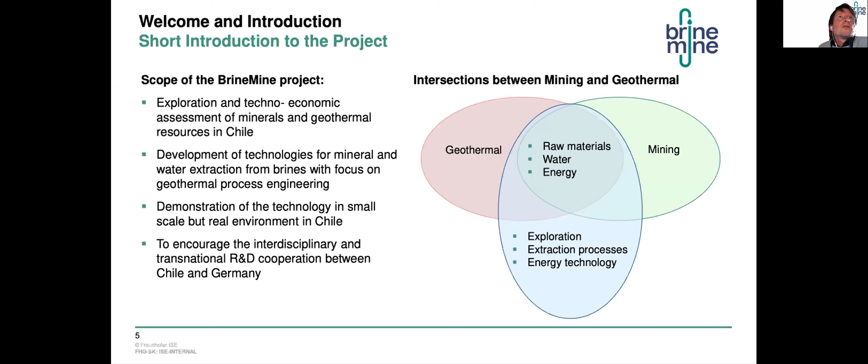The consortium consists of 7 partners. CEGA is already today represented by its director, Diego Morata. You'll present CEGA later on. They are together with KIT.

Sakul will present KIT later on, and GTN is involved in the exploration and the techno-economic assessment, while our institute from ISE together with the company Solar Spring will develop the extraction technologies. Our partners from Chile—Fundación Chile and GTN Latin America—will care for the demonstration in Chile. Finally, all partners are interested in encouraging interdisciplinary research work.

Coming to my last slide, this shows the main objectives of the workshop today. The workshop is quite important for us; it's one of the milestones of the project.

On the one hand, we want to share our actual research results that we got so far from initial tests in the Upper Rhine Valley in Insheim. We will also get an introduction to this site later on by Mr. Ude. But it's also quite important for us to receive your feedback and advice from all different levels, and all different stakeholders are on the roundtable later on.

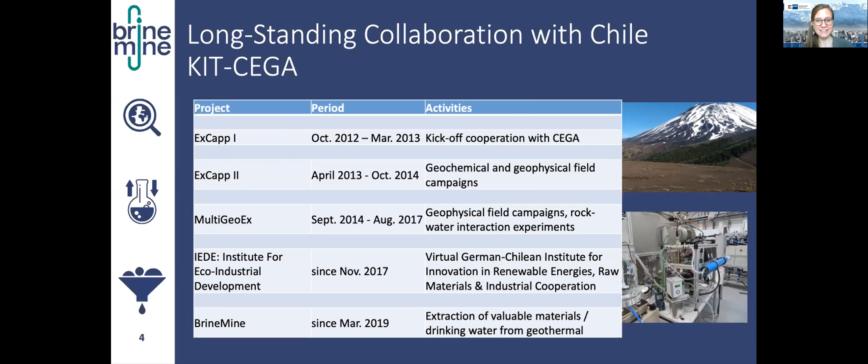Good morning to the Chilean assistants and good afternoon to the Germans. I would like to share my screen with you.

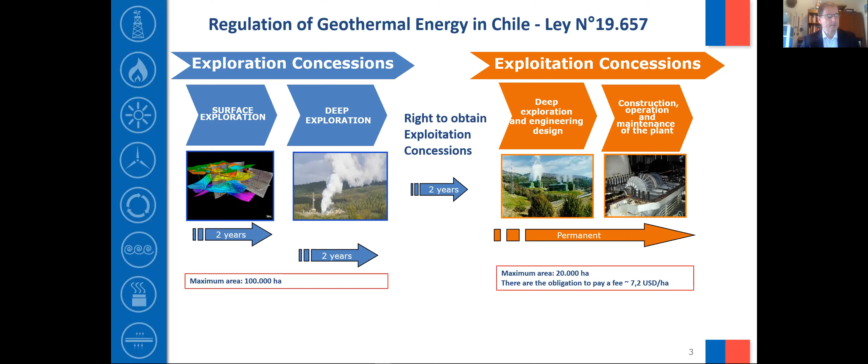It can be established for a maximum area of 20,000 hectares, and the law establishes an obligation to pay a fee of about $7.2 per hectare. The law also establishes that thermal water uses destined for health, tourism, or entertainment purposes are excluded.

This is a snapshot of the current geothermal concessions in Chile. We have 8 concessions for exploitation, and 4 are still requested.

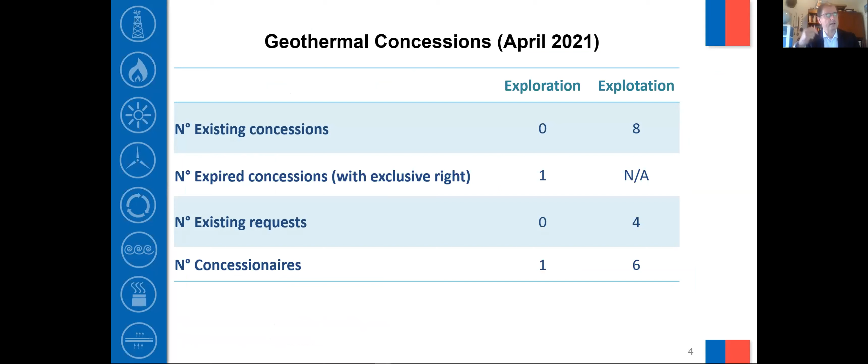So there's only one that has expired that has the right to have the exploitation concession granted later. So when we talk about the geothermal concessions in Chile, this is important. This is an important milestone, and we show this picture every time we can.

We have the Cerro Pabellón project since 2018. This is a project that was developed under the Apacheta exploitation concession in the north of Chile, in the region of Antofagasta. The concessionaire is Geotérmica del Norte, a joint venture between Enel and ENAP. Installed capacity is 48 megawatts, and the investment is $320 million.

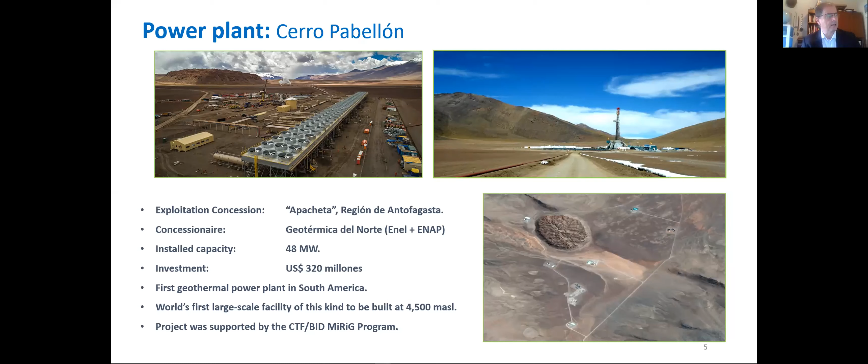It is the first geothermal plant at that commercial industrial level in South America, but it is also the world's first largest scale facility at this altitude, 4,500 meters above sea level.

Currently we have two operators aside from Cerro Pabellón. We have the Energy Development Corporation, which has the project called Mariposa in the region of Maule, and also Transmark, which has the project with the concession called Peumayen in Arauco. These two are looking at how they can start drilling this year.

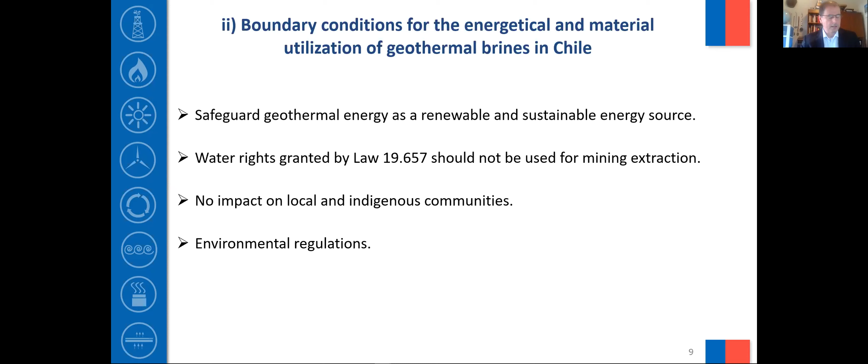That's basically what I wanted to share with you. And I want to congratulate you for this initiative, and I hope it will be very successful. For us, it is very important that we can truly add value in terms of these renewable energy sources. And we wish you the best of success.

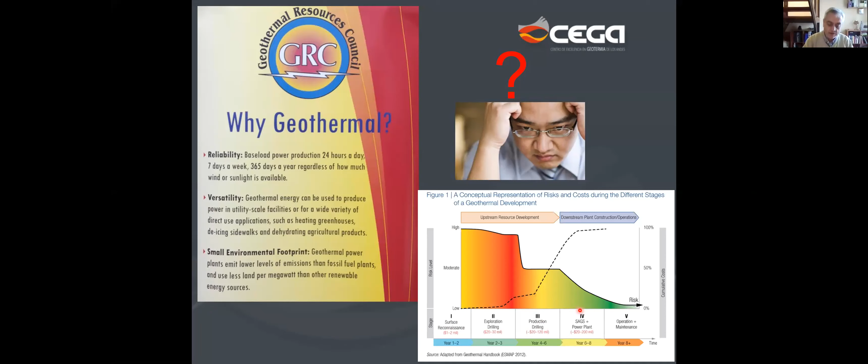Geothermal plants have a small footprint and very low emissions of greenhouse gases. We all know that the development of a geothermal project has a high risk factor upfront, lots of uncertainty at the minor stages. But once the resources are recognized, the risk is fairly low, and these may be developed quite flawlessly.

Why geothermics in Chile? This is a question somebody already asked. Chile is in a unique geological context where we have the subduction of the Nazca plate under the South American plate.

And the subduction of the Antarctic plate. And we have a volcanic chain going from north to south with huge volcanic activity that is shared by other countries of the Andes.

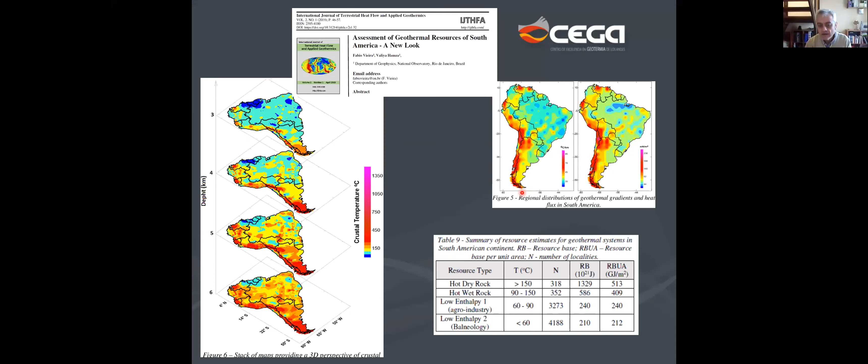So we should wonder why, with so many geothermal resources, only one plant is in operation. We can see that the history of exploration in Chile began in the early 20th century.

The Italian Society of Antofagasta hired the engineer Tocchi to analyze the geothermal resources in northern Chile. Back then, in 1910 and 1913, the idea was that at El Tatio, we could install up to 50 megawatts.

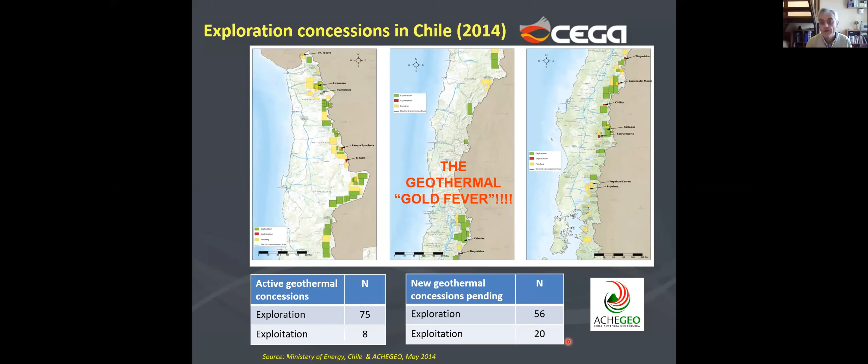So this gold fever, or geothermal gold fever, is gone, and today the sad reality is that there is little geothermal exploration in the country.

In fact, there are only 3 projects underway: Cerro Pabellón, Mariposa, and Peumayén, which used to be known as Tolhuaca. Cerro Pabellón, as Ruben said, is in northern Chile.

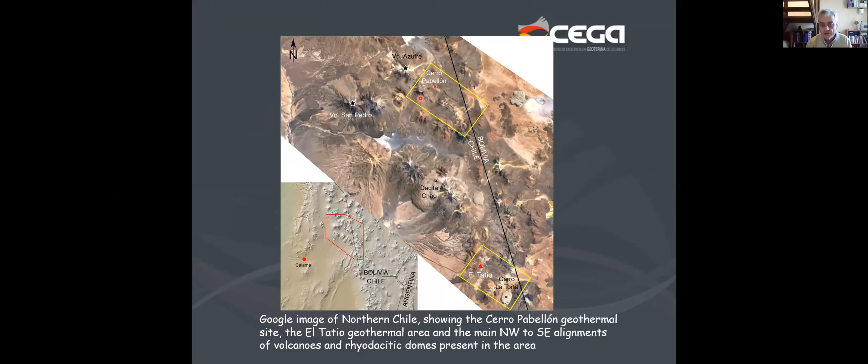This is El Tatio. It's a geological sector with high geological interest, where Cerro Pabellón is located, with some geological features I will not elaborate on.

Let me say that thanks to a collaboration program with Enel Green Power and Geotérmica del Norte, we at CEGA are conducting research to understand the geothermal resources at Cerro Pabellón. It's an incredible area, difficult to work in.

It's 4,500 meters above sea level, 48 megawatts with an expansion plan up to 33 additional megawatts. So by late this year, we will have 81 electric megawatts. With the 48 megawatts, you can meet the needs of Calama, for instance.

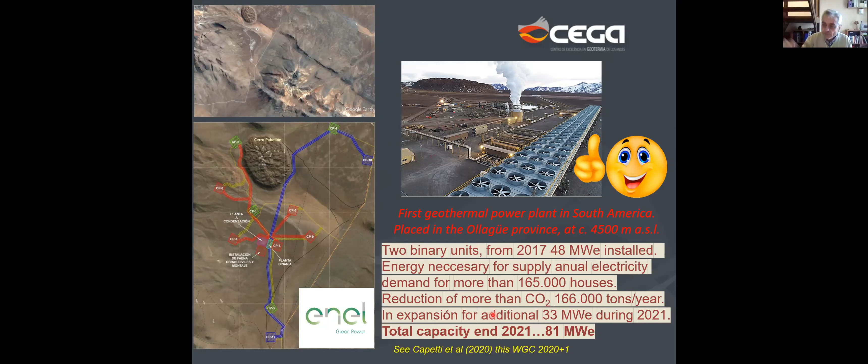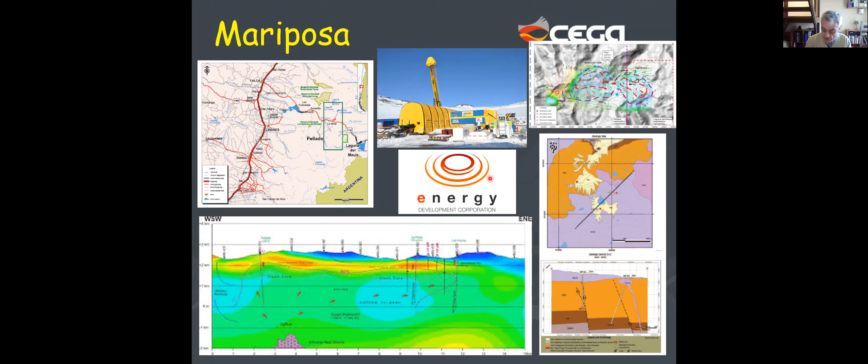If we go to central Chile, we have Mariposa. It's EDC, a Philippine company that has the concession. Talca is 250 kilometers south of Santiago, and then we have the Mariposa project up in the Andes, where the geothermal potential could be in the order of 100 megawatts, maybe more. Some wells were drilled, but right now this whole project is in standby because of the market conditions.

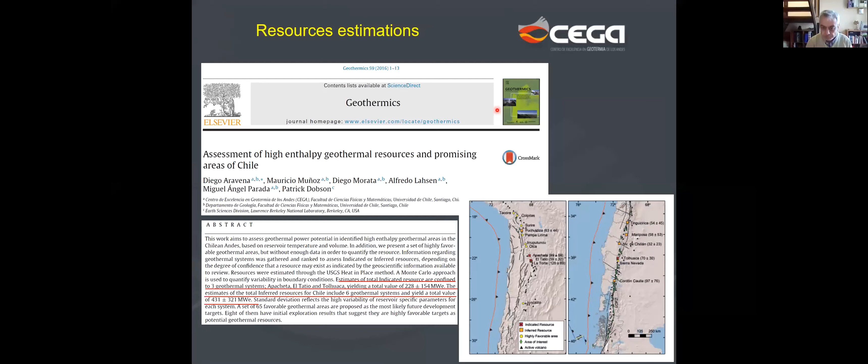Chile's potential is huge, but it is unknown because of the lack of data. We did run some analysis with the geothermal resources which are better known, as published in this paper. In fact, this was the basis, the foundation for the work that Ruben referred to on the geothermal task force, focusing on those areas with better knowledge in terms of exploration by companies.

We reached the conclusion that by 2030 there could be 500 megawatts, and about 600 megawatts, and by 2050, 1,500 additional megawatts if the economic conditions are right. By 2050, we could have 2,000 megawatts of electricity using geothermal energy.

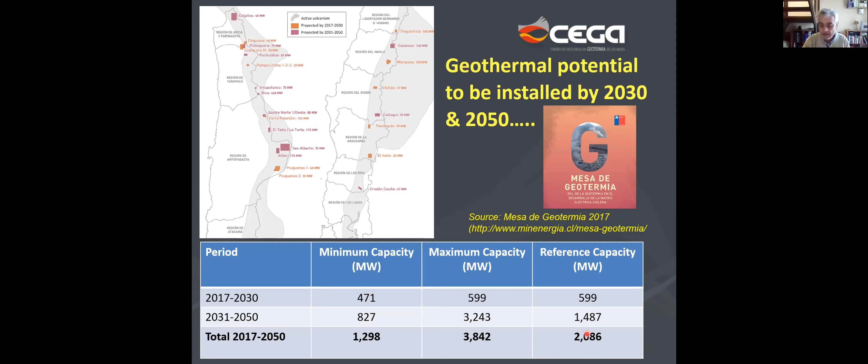As Ruben said, it's not our potential. The academic numbers show that the potential could be around 40,000 megawatts. These are numbers based on academic analysis. And if you want to be more conservative, these would be the actual numbers based on data supplied by the industry. And these 2,000 megawatts, they may reach 4,000.

Well today, as we have seen, we have only 48 megawatts installed at Cerro Pabellón, thanks to Enel Green Power, plus 33 additional megawatts, but that's it, that's all.

So we have a problem as a country because the amount of coal in the plants running on coal, which have to be decommissioned by 2050, is about 5,000 megawatts worth of coal. The only advantage it has is that it could be used as base energy because it can run 24 hours a day. The only renewable energy that can supply this kind of energy is geothermics.

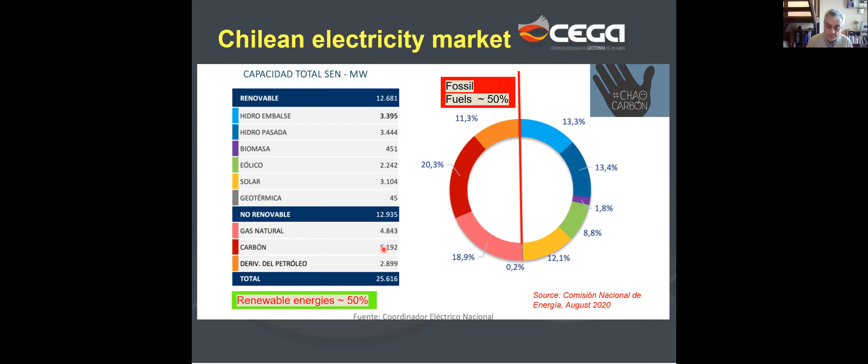So, as Ruben Munoz said, Chile's bet on a coal-free power mix should be the big encouraging factor for geothermics. And there is a new player called green hydrogen in the last few months. The government has built a plan called the National Strategy on Green Hydrogen, where we proposed green hydrogen production using renewables. But they also refer to wind and solar. Geothermal is not in this document, and this is a political decision which is hard to understand.

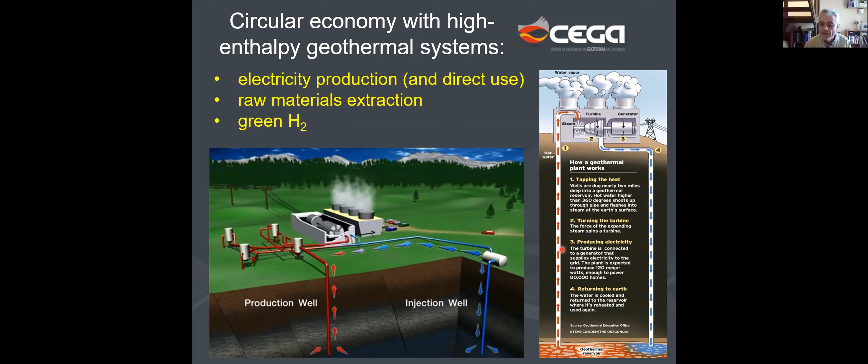But this BrineMine project is the opportunity to prove that geothermal energy is part of this concept of circular economy. Not only power, not only electricity in different areas of the country, but we can extract or recover strategic metals. Valentin will elaborate on that. And also, we could have hydrogen production plants throughout the country because geothermal resources are all over the country.

So, in conclusion, I would say it's a terrible situation here in Chile, even though we have huge, high enthalpy resources in the Andes. It's difficult for them to be developed given market restrictions and the free market that prevails in our country, despite having more than 2 gigawatts available by 2050.

We need a clear transition. Over 4,000 coal-based megawatts have to be removed from our power mix, and this should be a great opportunity for geothermal power. It would be a government decision betting on clean, efficient, proven technologies.

So the actual interest should be a mandatory part of the constitution that will be drafted in this country. This is the opportunity once and for all to go for clean, renewable energies, of which Chile has ample. And there is an opportunity for medium enthalpy systems, smaller plants, or even direct use of geothermal power. This is unknown here in Chile, an amazing field of opportunity. And green hydrogen, of course, is a new opportunity once again.

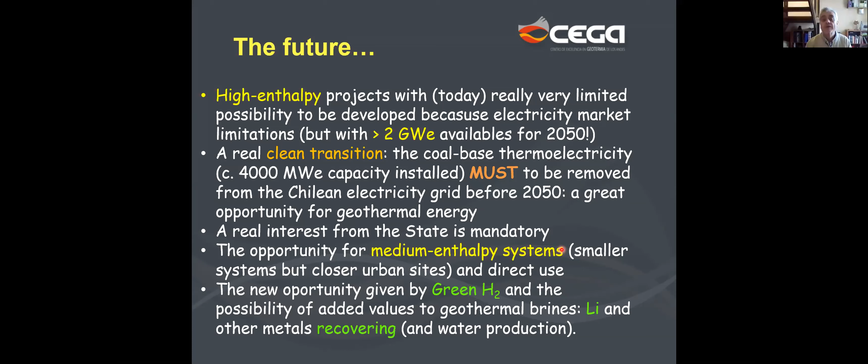There are tons of lithium which are extracted, recovered, and then reinjected. Rare earth, gold, which are being extracted, going through the plant, and then being reinjected. This is an opportunity for the future, an opportunity for a much more sustainable world.

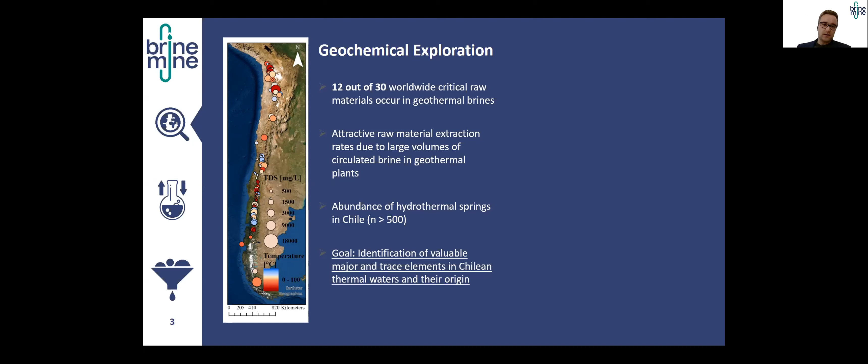But we do not just want to talk qualitatively about the elements in these brines. We also want to quantify our fluid pathways. Therefore, we combine our geochemical exploration with geophysical exploration. One technique we use is the internationally approved approach of magnetotellurics, where we use the fact that saline waters at depth have higher conductivity than the surrounding subsurface. Therefore, we can make the fluid bodies in the subsurface visible.

So we cannot just say where our water is coming from, but we can also see how large the water bodies are in the subsurface, as we did here in Tolhuaca. That means we cannot just qualitatively describe where and what raw materials are occurring, but we can also see how large our geothermal reservoir is, and with that, how large our potential for raw material extraction is in these reservoirs.

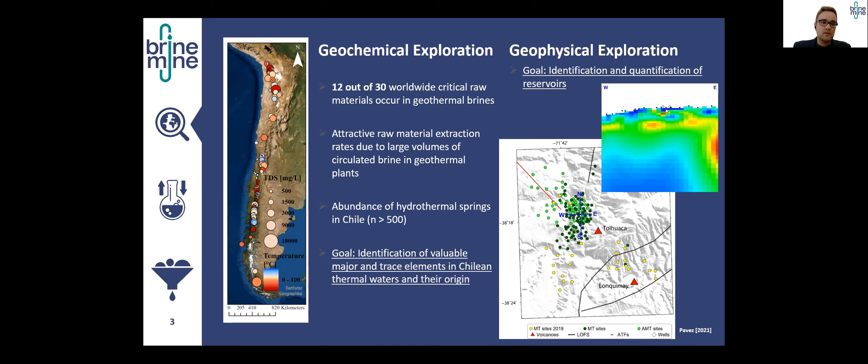But let's talk about whether there is an economic potential in raw materials from geothermal brines. Therefore, we started some first economic considerations. Since we unfortunately could not conduct our geochemical sampling campaign, we started our research with existing data, using data from different springs all around Chile, taking a closer look at different elements.

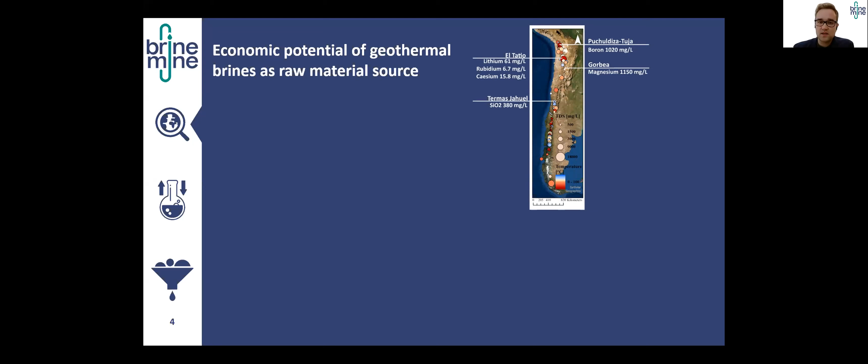We focus not just on one element like lithium, but also trace elements like rubidium or cesium, or more enriched elements like boron or magnesium. To elaborate the economic potential, we developed simplified production scenarios. The high economic potential does not come from large occurrence of these elements, since we see just some milligrams of them, but from the high circulation rates we have in a geothermal power plant. So we start with a typical flow rate of 80 liters per second.

Under an availability of 90% of the time of the year, this results in a really large amount of circulated brine per year. Further, we assumed an extraction rate of raw materials of about 50%. This is just a basic estimation to make a quantification of the potential.

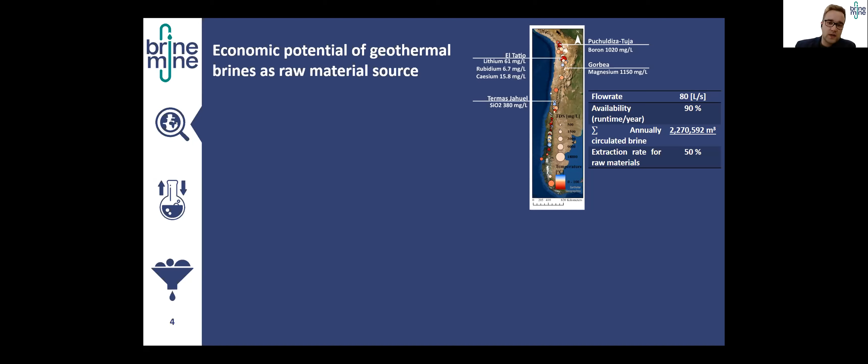For example, the research of lithium predicts an extraction rate of 80 to 90% using ion sieves for extracting lithium from geothermal brines. As a result of our initial content of raw materials in the brines, in combination with our annually circulated brine, as well as our extraction rate, this results in the circulated mass per year.

We can see here that according to the total amount of our elements, we have different enrichment in our circulated brines. We also looked up in different commodity tables the prices for different elements, choosing between pure elements, as for example magnesium or cesium, or different compounds, depending on the different commodity markets. As a combination of the specific price and the circulated mass, we then get our economic potential.

As we can see here, different elements have a high economically interesting potential. For example, lithium has a quite interesting potential, but we also have hidden champions like magnesium or boric acid, which have similar economic values. Further, we have highly interesting elements like cesium or rubidium, which are in fact among our least enriched elements in the brines. So we can say, after a first study, that we can derive elements not just for battery or high-tech technology from our brines, but also for different kinds of industry.

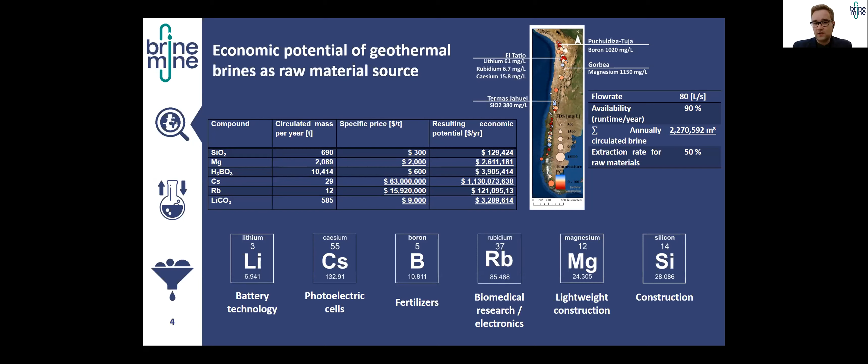In our first approach to extracting raw materials from geothermal brines, we yet focused on the element with the lowest economic potential: silicon. But why did we focus on silicon in the first place?

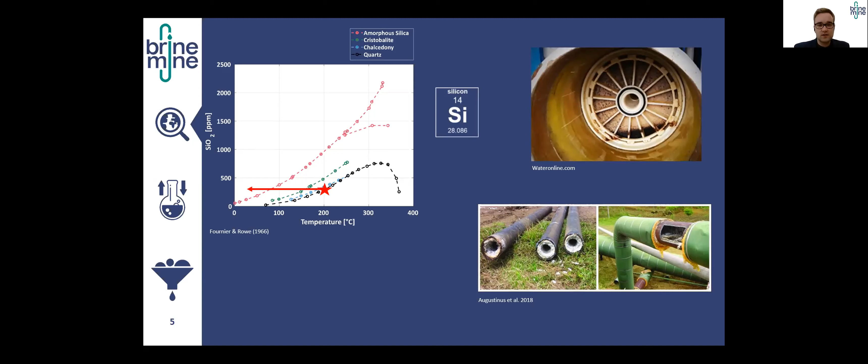But this is not just a problem for cooling geothermal brines for energy production, but also for water treatment in waters with high silicon content. So we can say that silica is a limiting factor for geothermal energy production and associated raw material production.

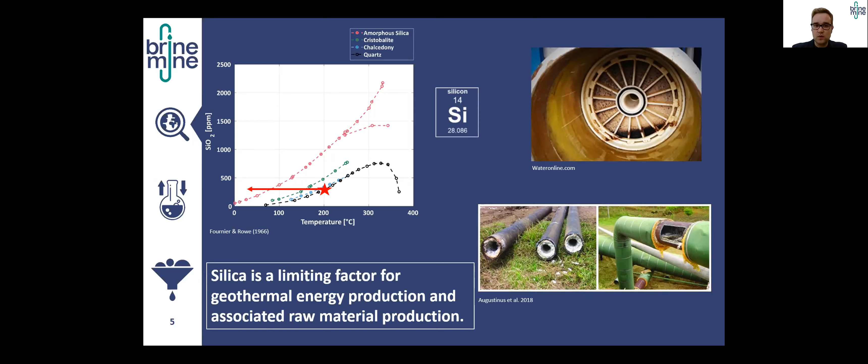Therefore, we first had to find a way to reduce our silicon effectively and selectively, because we do not just want to reduce the silica, we also want it to not affect any potential other target elements. So we started our laboratory studies using artificial brine, which we designed after the role model of the brine of El Tatio, giving us a basic Chilean reference result.

A fundamental approach is that silica has different charged species in its aqueous form. In neutral water, silica has no charge at all. But if we increase the pH value of the brine with an addition of, for example, sodium hydroxide, we bring our silicon phase into a one-times negatively charged phase. If we then add a positively charged cation, for example calcium, this results in a strong reaction and formation of calcium silicate hydrates. This is the fundamental approach: we bring our silica into a negatively charged form, add some positively charged ions, and then bring it to precipitation.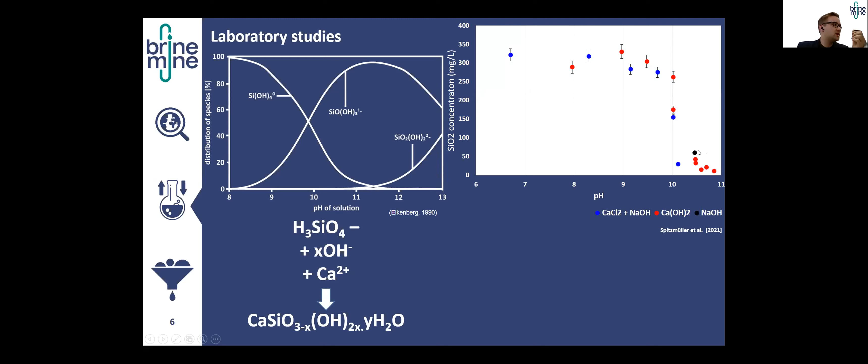We evaluated this with different reaction agents and tried our best to find the perfect sweet spot for the most effective reduction of silicon in the brine. With this approach, we were able to reduce about 95% of silica from our geothermal brine, resulting in the precipitation of bright silicon compounds. With these small-scale experiments, we continued and brought it to a larger scale at the Fraunhofer Technical Center in Freiburg.

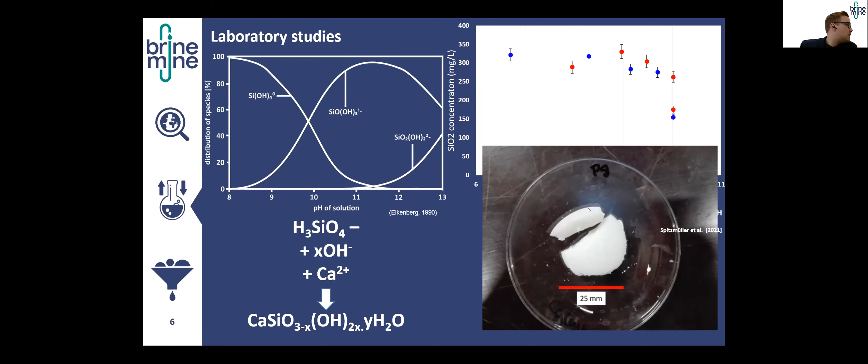So I will hand over this presentation at this point, and I want to go into the strategy of turning this idea of silica reduction into an industrial process in the framework of geothermal waters. So we can see a typical geothermal power plant. We have the geothermal brine source, and we extract heat at a high enthalpy level for electric power generation before reinjection into the well. So at this point, we want to attach our brine extraction, and we take part of the brine out and process our first water treatment step, which is the desilicafication.

This is done by reactive precipitation, done with calcium precipitation, as Valentin has just shown. Then this step is followed by a pre-concentration step driven by pressure-driven reverse osmosis in order to produce fresh water and raise the concentration of the still dissolved valuable compounds. Since the pressure-driven reverse osmosis relies on electrical energy, we directly use the generated power on site. Then this process is followed by a post-concentration step, which is shifted to a thermally driven process called membrane distillation, in order to further push the concentration to higher limits and extract water. This thermally driven process exceeds the borders in terms of high salinities

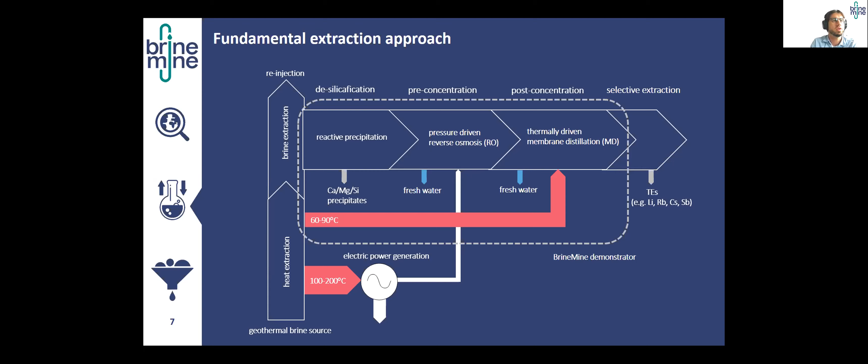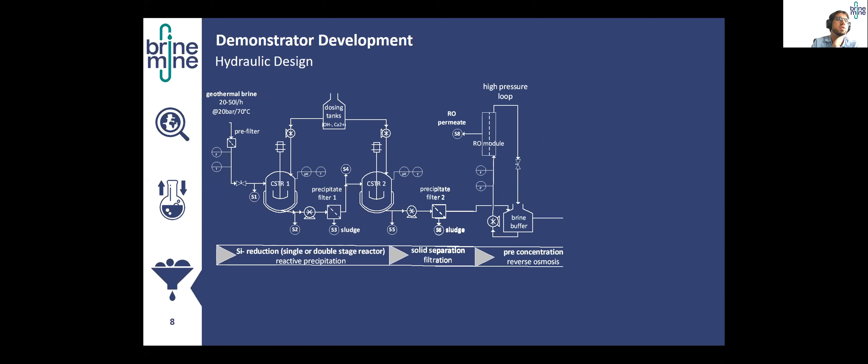So we turned this idea into an engineered hydraulic design. I don't want to go into depth into this rather more complex hydraulic schematics, just give you an idea what we have realized in the framework of BrineMine. We have the first process from the geothermal brine inlet and the silica reduction in stirred reactor tanks, which is followed by the precipitate extraction, which is a filtration step. Valentin, can you please click? Which is then followed by a first concentration step, the pre-concentration with reverse osmosis, and then followed by the post-concentration step, the thermally driven membrane distillation.

Next slide, please. So as a first showcase, we selected the Upper Rhine Graben showcase because there is a very interesting brine composition, and there is a running geothermal power plant project in Insheim. So we had access to these brines. I want to share some of the water chemical analysis of these brines. We can see that in the table on the left-hand side. We see this is a very high salinity brine exceeding 100,000 ppm of total dissolved solids.

Additionally, we have a quite interesting amount of dissolved lithium, which is about 164 ppm, coming along with a high level of calcium, which can directly be used for the precipitation of the silicon.

We can see a rough schematic of the power plant. You will hear a lot more detailed information on this project from my following up speaker, Mr. Ude. But just roughly, we have the extraction from the brine from the reservoir with the extraction pump, followed by a particle filtration, and then the heat extraction. The brine is cooled down from about 160 degrees to about 60 to 70 degrees, depending on the season, for the electric power generation based on an organic Rankine cycle. Before then, the brine is re-injected into the reservoir. And the point after the heat extraction is the access point of our demonstration plant.

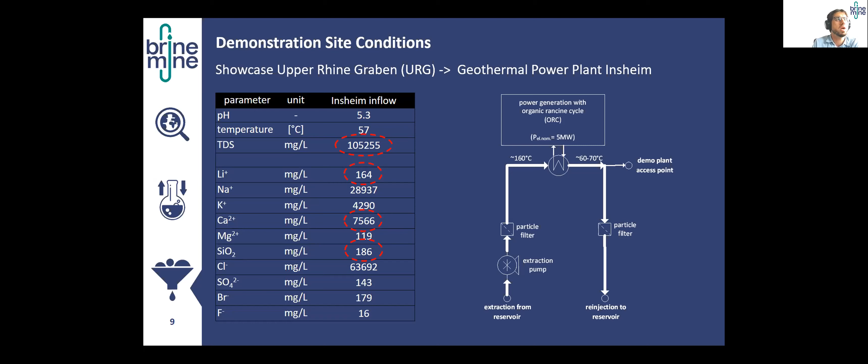So in fact, we built two generations of demonstrator. The first we could call a demonstrator prototype because it was meant to be a flexible semi-automated test rig to go on site and see how the water chemistry behaves and how our components and automation strategies work. You can see here the modular two-stage precipitation reaction system with flow controlling, dosing control, and the MD post concentration on the test rig.

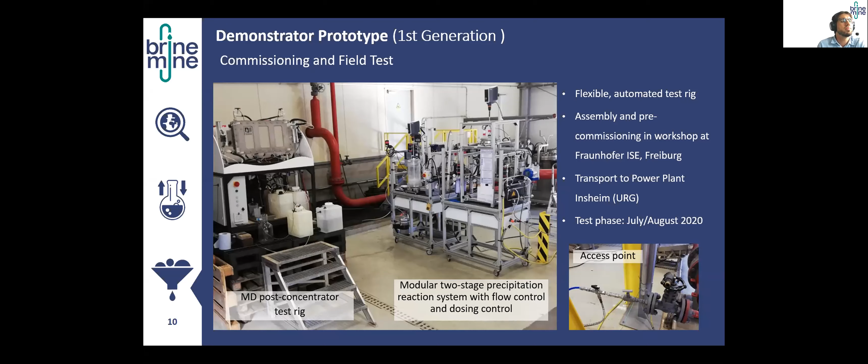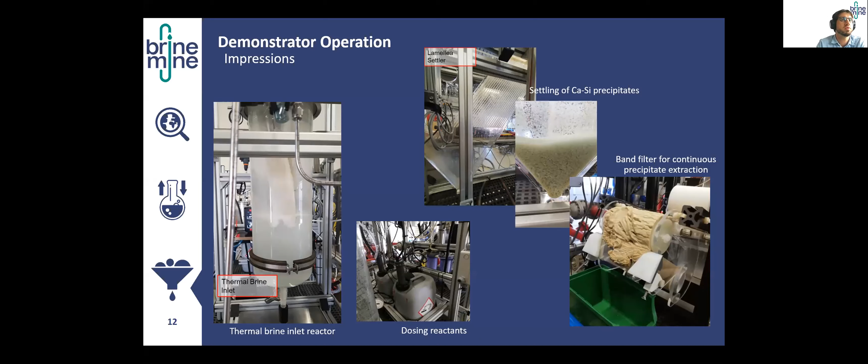At this point, I will hand over the presentation back to Valentin, who will give you more insights into the scientific results of this field test operation. Thank you, Daniel. So after seeing the images and the implementation of our procedure in the field, I want to give you an overview of what is happening in the chemistry.

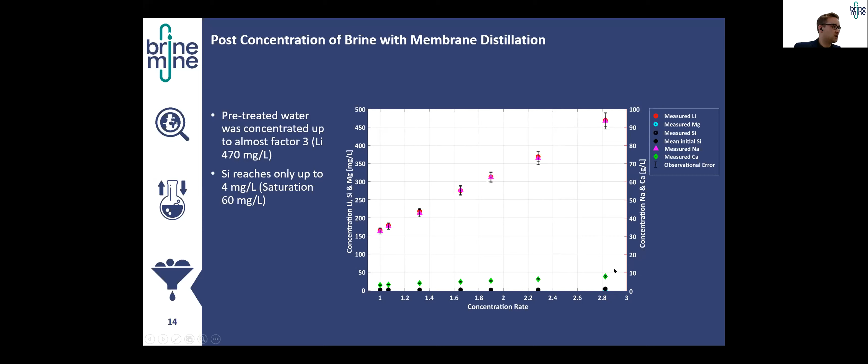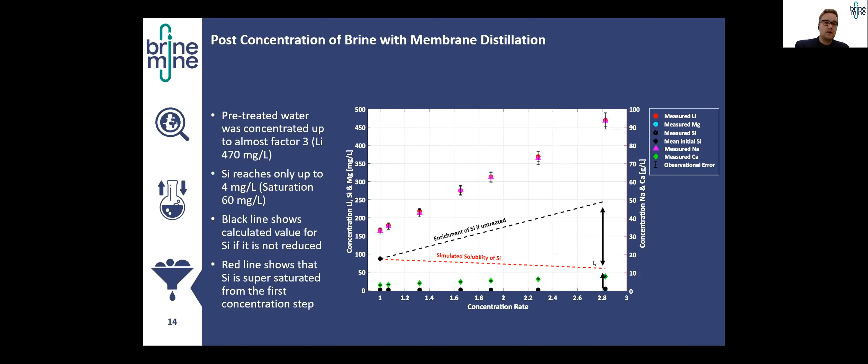Concluding, we can say there's an enormous potential of raw materials stored and circulated in geothermal waters in geothermal power plants, and our extraction and exploration campaigns will bring even more to light. We could also say we successfully developed a selective precipitation method from scratch in the lab, and brought this into a pilot plant scale in a real-life operating geothermal power plant. The next step is to bring all this to its original place, to Chile.

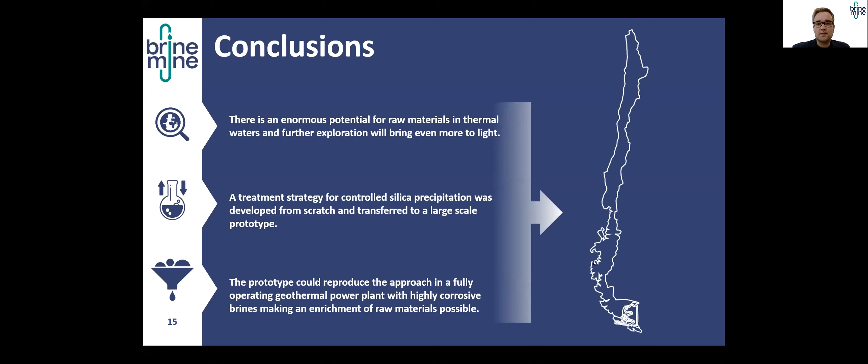Before we leave you with this presentation, we also prepared some visualized impressions from our prototype testing phase, which we had in Insheim.

Can you hear me? Yes. Okay, I will give some comments.

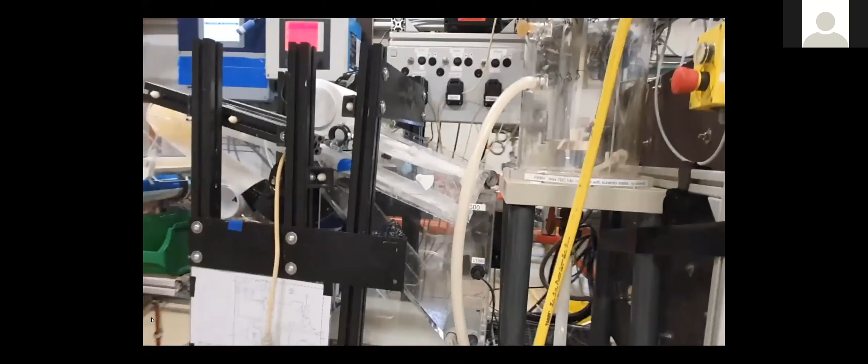Here you can see the prototype on site in Insheim, the power plant. This is our access point. And if we turn the valve on, then we start with the filling of the transparent reaction tank.

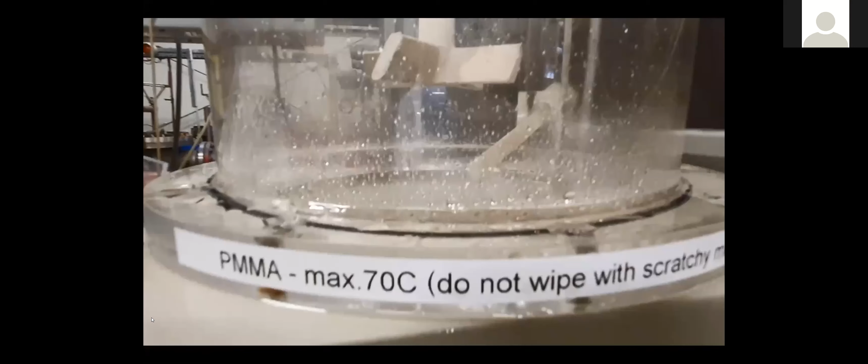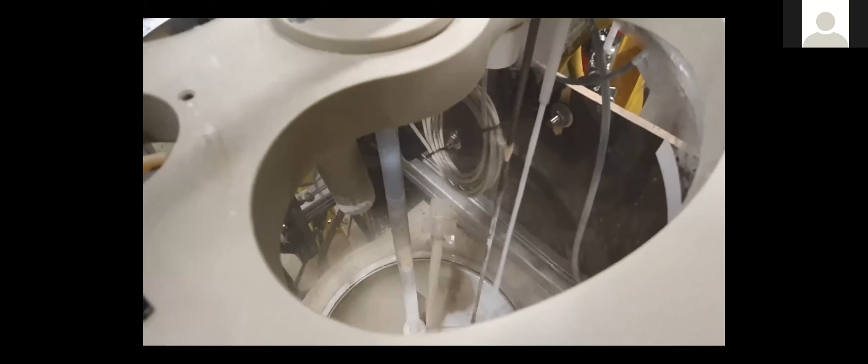Here we see the brine entering and slowly filling the tank. You can see the screens of the control systems, and we can see that the brine is quite warm.

Stirring is started, and here we can see the initial adding of the reaction agent, directly starting the formation of silica precipitates in the form of white flakes. Once we reach steady state, we see a whitish slurry, which is the brine.

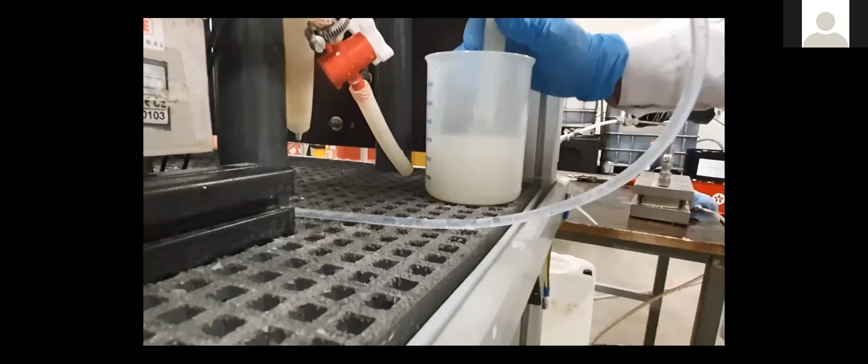In steady state, we started sampling for chemical analysis to end up with the results you just heard from Valentin. The next step is the separation of the solids from the fluid.

You can see the band filter working, continuously extracting the precipitates, so that we end up with a precipitate mud and some clear phase for further treatment. Here we can see the unfiltered and the filtered brine.

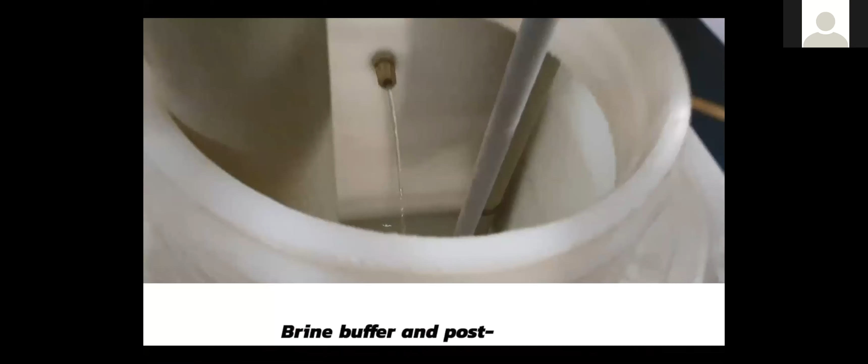The clear phase is then pushed forward into a neutralization tank, stabilized and prepared for post-treatment. We collected this water in big IBC tanks in order to do studies for the extraction processes and downstream processes.

And with this, we are also at the end of our presentation about the results and the economical considerations. We thank you for your attention, and we would be happy if you would get in contact with us.

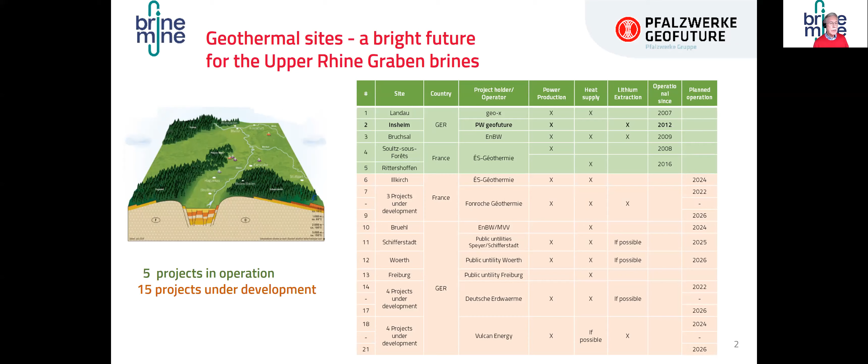But coming back to the Insheim project, here's a short overview of the project development story.

So the project was started under the organization of a private project development company, the Hot Rock Engineering Company from Karlsruhe, situated at the same place as KIT. After some substantial exploration processes, they started the first drilling operation in June 2008, and the first well was successfully drilled at the end of 2008.

After some testing, the whole project was acquired by our present owner, the Pfalzwerke Group, a public utility company owned roughly 75% by the local communities in southwestern Palatinate.

Under their application, the second well was drilled with the same group of actors, the drilling company and the engineering company. They conducted an intensive test phase to examine the flow rate and temperature of the brine. One outcome of this test phase was to drill a further sidetrack in our first well, which today is the re-injection well, to have better permeability in the reservoir and allow lower re-injection pressure. The reason why we did so, I will come back to that later.

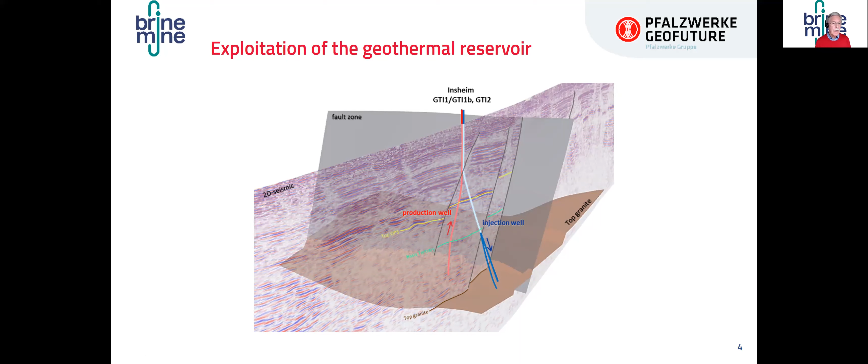We have to keep in mind that all these binary power plants have an on-site power demand of about 25% of the produced electricity. The financial basis is the remuneration under the German Renewable Energy Law, which guarantees 25 euro cents per kilowatt hour gross for a period of 20 years. That's why the whole project is calculated for a period of 20 years, but the overall investment was planned for a bit more, 50 million euros.

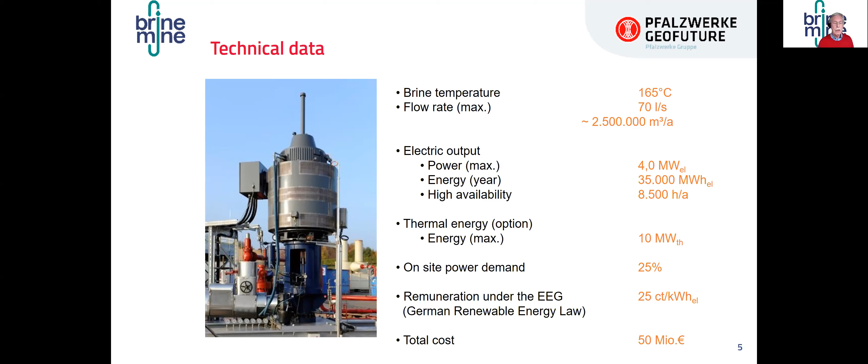To give you an idea of what you have in Chile so far: the Cerro Pabellón geothermal power plant in northern Chile is 20 times bigger than ours, but it was designed and produced by the same company, the Ormat Group from Israel and Nevada in the US.

In the Rheingraben, we have to focus very much on the mitigation of induced seismicity, which is definitely not a problem in Chile, as I presume. We have to keep in mind the perceptual range, which is fairly low I presume from a Chilean point of view. To ensure public acceptance, we operate our thermal power plant at response profile level 1, with very low induced seismicity and almost unfeelable ground velocity values of 0.2 to maximum 0.5 millimeters per second - well below the perceptual range, but this is mandatory in our particular area to ensure public acceptance.

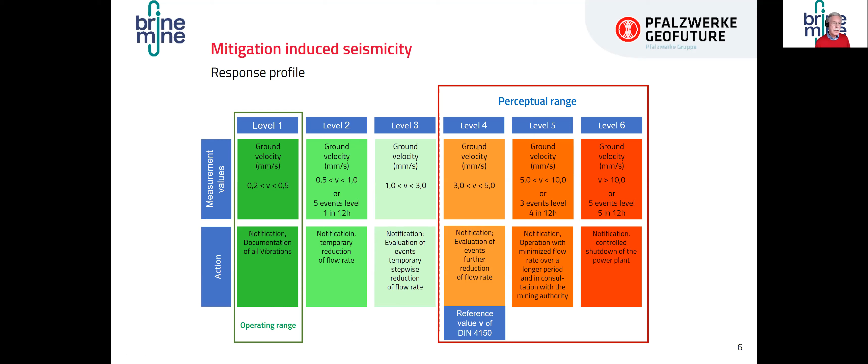To gain access to the brine, as we have a very deep reservoir, we operate a so-called line shaft pump. The pump itself is a 39-stage circular pump, installed at 750 meters depth and driven by a driving shaft or line shaft, which of course has a length of 750 meters as well. It looks quite complicated, but once you've got familiar with the whole system and understood all the problems which might occur, it is a very reliable system.

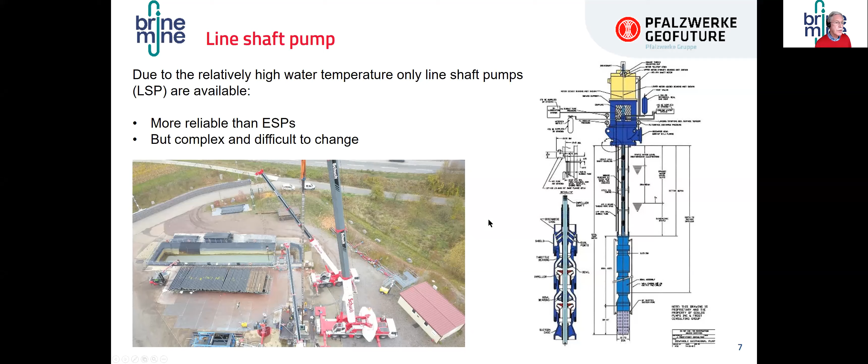So we have to focus on the brine quality in the upper Rhine-Graben. We have a very high gas content in the brine, which differs from site to site. In Insheim, for example, we have roughly 1.2 liters of gas per liter of brine, and the gas consists mostly of carbon dioxide, with a little nitrogen and methane.

So when operating the brine system, we have to keep in mind this high gas content, and therefore have to operate the whole thermal brine system above the degassing pressure, which at the Insheim site is around 19 bars at a brine temperature of 163 degrees. At the other two sites it's quite similar.

Coming to the lithium situation, the upper Rhine-Graben should definitely be one of the most potentially viable lithium deposits in Europe. As already shown by the other authors, the lithium content in our brines is between 150 and 200 milligrams per liter. It differs a little from the western to the eastern side of the Rhine-Graben.

We believe that successful lithium extraction from geothermal brines could bring additional value to existing and future geothermal projects in Europe, especially given the limited public funding for geothermal projects. We then have to develop further financing instruments to make these projects possible. It also has domestic importance, as we will be able to partially supply the strategic raw material lithium within Germany.

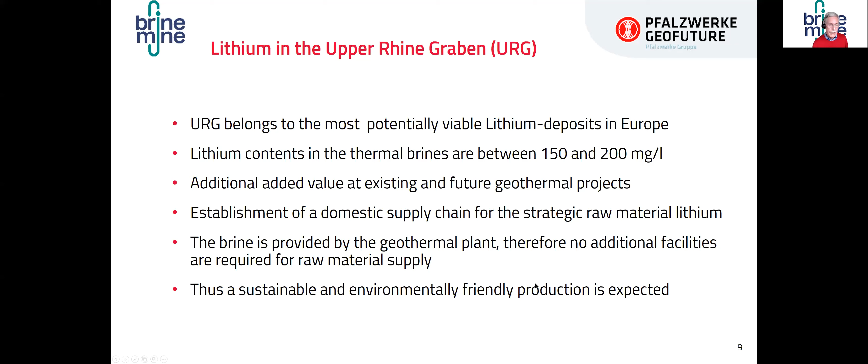Now I will give a small virtual walkthrough of our power plant. We will start with a bird's-eye view of the production well, then walk around to look at our unit where we produce the energy. We'll look at the largest unit, the air-cooled condenser, then the thermal water treatment facility where the BrineMine test unit has been in operation, and finally look back at the overall site.

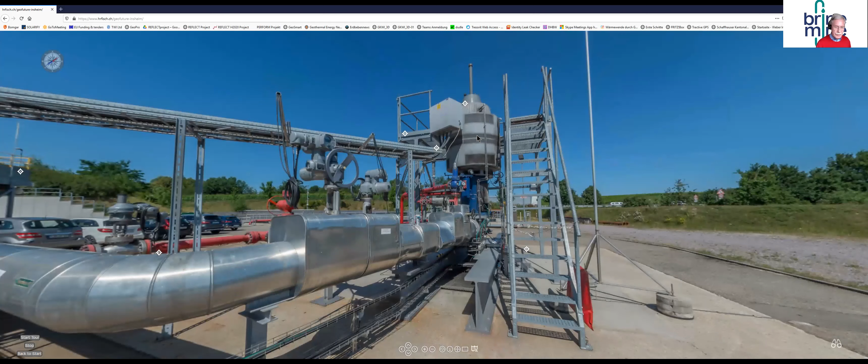So there we have a view of the driving motor of our line shaft pump. This is the production well. This motor drives a 750-meter-long driving shaft, which is continually greased, operating our submersible pump at the depth of the well.

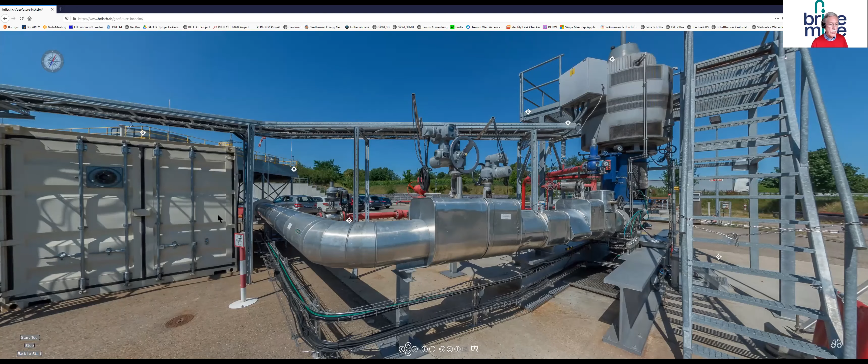So the hot brine is pumped through these insulated tubes, and the returning cooled brine flows through the red, non-insulated tubes. This container is just a service container where we have installed the greasing unit for the line shaft, as well as a water cooling unit for the top bearings of our line shaft pump.

So now the hot brine is coming out of this hole and flowing into these heat exchangers. But first I would like to give an overall view of the organic Rankine cycle unit, where we are producing our energy.

We have here the turbine, driven by the working fluid, which is isopentane, commonly used in ORC units worldwide, not only built by Ormat but also by other providers from Italy or Japan, for example. It secures high efficiency of the whole process, and once some safety regulations are respected, it allows a very safe operation.

So the vaporized working fluid expands in the turbine and flows horizontally to the left side into the large air-cooled condenser, where it will be fully condensed, as we need a fully condensed fluid before we can fully vaporize it once again. On the right side, directly connected to our turbine, is the generator, where we produce up to 4 to 5 megawatts of electricity.

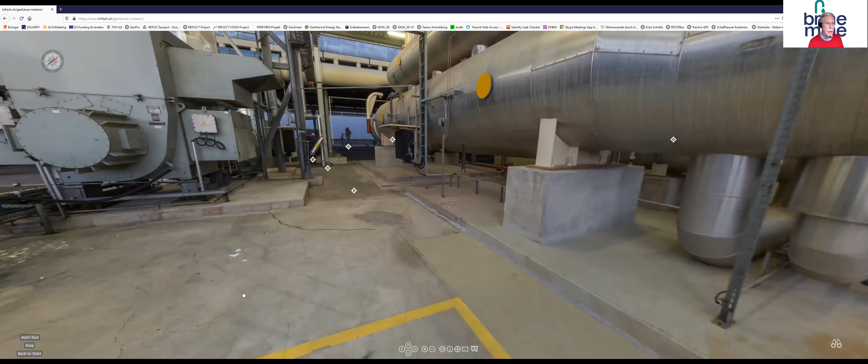So here we have the large vaporizer, where we vaporize the working fluid, and the vaporized working fluid is then led over by this large tube over to the turbine.

These vaporizers and the combined heat preheaters on the other side have to be cleaned biennially, as due to the high mineralization of our brine, we get a lot of precipitation and scaling effects in our vaporizers. They have to be cleaned of these tube and shell heat exchangers with very high pressure, roughly up to 1,000 bars, every second year, producing residues which then have to be treated and immobilized to allow for proper disposal.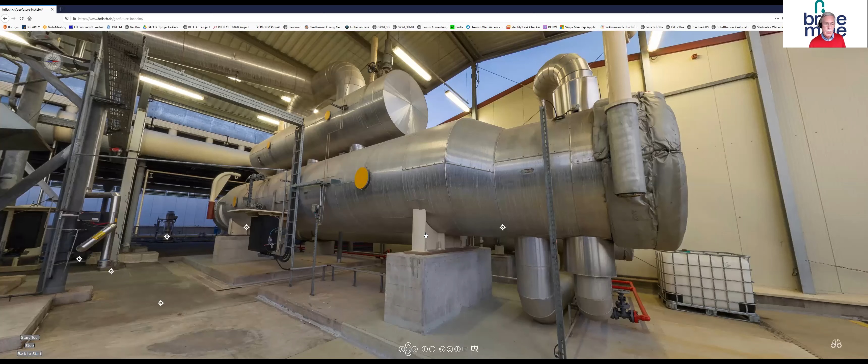So then I would like to give you an impression of our filter hall where the BrineMine tests have been executed. The hot brine coming in from the production well will be filtered with 2 simple basket filters with a mesh of roughly 150 microns.

Then we are injecting certain products into the brine to avoid scaling effects. The first is a phosphonic acid to prevent barium sulfate from scaling out of our brine. The second product is a combined product to prevent the piping system from corrosion, setting up an anti-corrosion film within our piping system.

This hot, conditioned brine is then injected into our heat exchangers by this tube, and the returning cooled down brine, at an average temperature of 65 to 70 degrees Celsius, returns back into our filter hall. It then has to be filtered by a double filter group, as we have to prevent scalings from clogging our reservoir when pumping the returning fluid back in. In this particular place, the BrineMine unit has been in operation, connected to the brine circuit via these valves, as you have seen in the video.

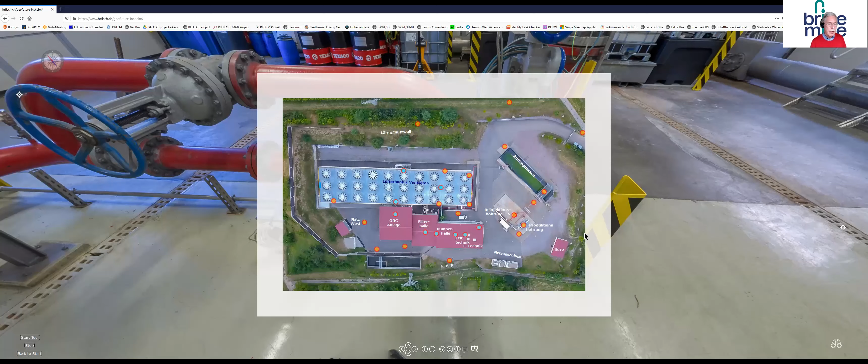So let's keep to our time, with a short overview back to the site. There you can have a look at the wonderful Southern Palatinate wine area.

SQM has 5 different business units. We participate in the business of lithium, special nutrition, iodine, potash, and some industrial chemicals. Last year, 2020, we had revenues around 1.8 billion, and about 70% of our gross profits came from nutrition and iodine products.

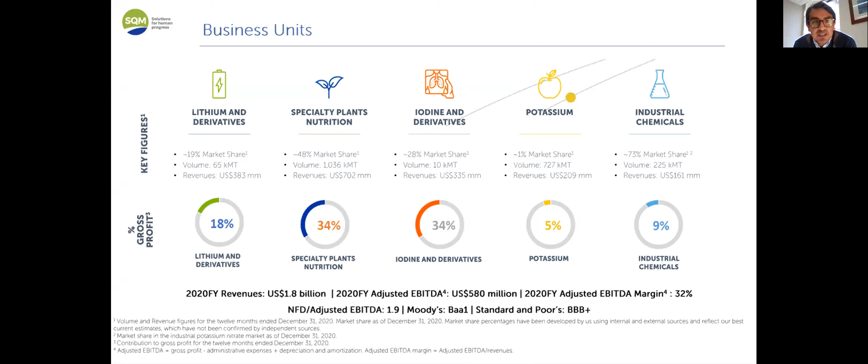So where are all these products coming from? We have 2 main mineral sources. One is caliche, and our caliche mines are in the northern region of Chile called Iquique. The other is brines, which we obtain from Salar de Atacama.

Next, we'll see the products we obtain from these 2 resources. From caliche, we produce iodine and also sodium nitrates. From brines, we produce potassium as potassium chloride and also lithium. At the end of the process in Salar de Atacama, we obtain a highly concentrated lithium brine. And from our potassium from Salar de Atacama and our nitrate from caliche, we also obtain another product: potassium nitrate.

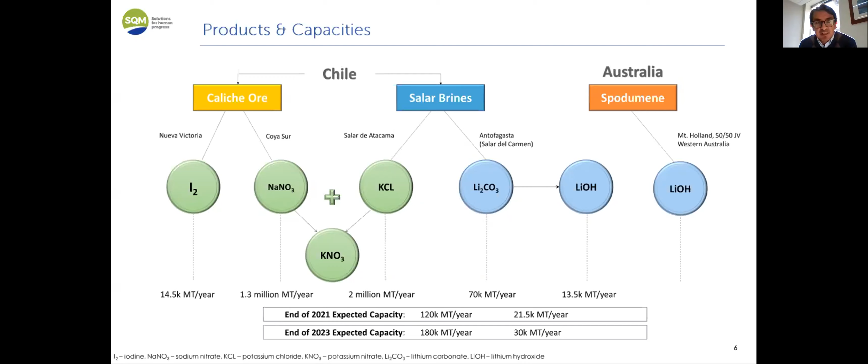If we move to the next slide, let's focus on lithium and potassium mining, and let's go in deep into what we do in Atacama Salar. Here, as you can see in the picture at the bottom left, there are some ponds. This is our pond system for making lithium products and also for making potassium products.

How do we do it? How does it work? We take the brines from wells. So from the Salar de Atacama, we pump brines out. We have different wells surrounding all these solar ponds, and we put this brine in halite ponds. In these halite ponds, what we do is remove all the sodium chloride that is in the brine, most of it, because all the brine that comes out from the wells is already saturated in sodium chloride.

So what we do after this is move the brine to the next group of ponds, called sylvinites. In these ponds we get some potassium salts, and these potassium salts are a product for us. So we put them in a plant in the Salar de Atacama, a facility for processing these salts, and finally get 95% purity potassium chloride.

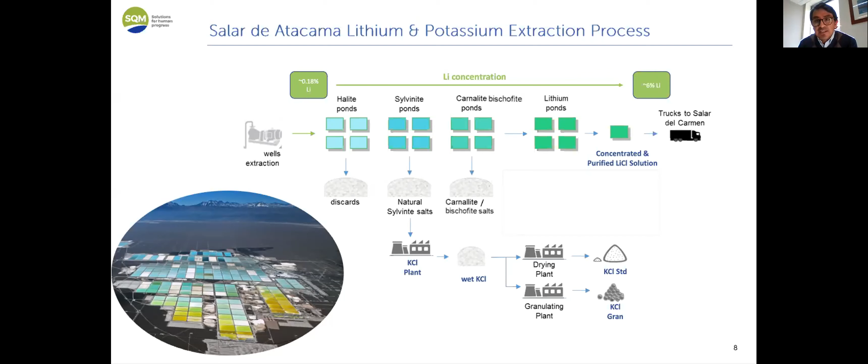And if we move to the next slide, we can see what we do in Antofagasta is take the brine and remove some impurities, mainly boron, then some calcium and some magnesium still remaining in the brine, and at the end we produce lithium carbonate.

And also we have the chance to produce lithium hydroxide. So we take this lithium carbonate, a main raw material for the production of lithium hydroxide. That is what we do with our resource in Salar de Atacama.

And as you can see, we can obtain different products: potash, lithium, and also, if you want, some magnesium chloride, a bischofite product that can be used for improving roads, for removing dust on the roads. That is a chemical product already used by mining companies here in Chile.

Okay, so let's move to the next slide and look at some figures about water consumption for lithium production, and the CO2 emissions for all the projections to come. In the next slide we're going to see our water footprint.

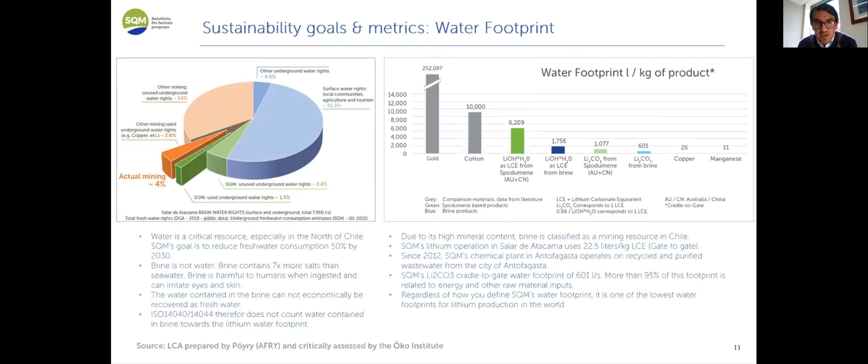We are doing a lot of effort for reducing that figure, and today we have reached a significantly lower figure than before. So on the next slide we're going to see the carbon footprint.

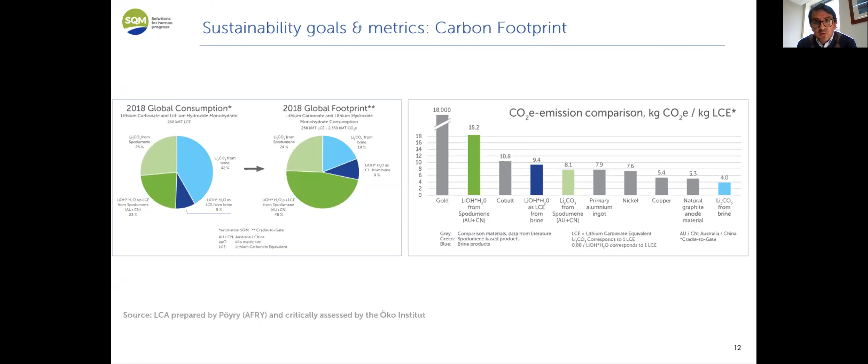That's our carbon footprint, also based on the LCA we prepared in 2020. Let's move to the next one, where we can see just a summary.

Let's move to the next one, please. Here we can see our goals for 2030. We have very strict goals. We want to reduce our brine extraction and our water consumption by 2030 by 50%, and also we want to be carbon neutral by 2030 in lithium and potash.

All our goals are based on our sustainability statement, which was public information released some months ago. You can also see here all the investment we are making to reach these goals.

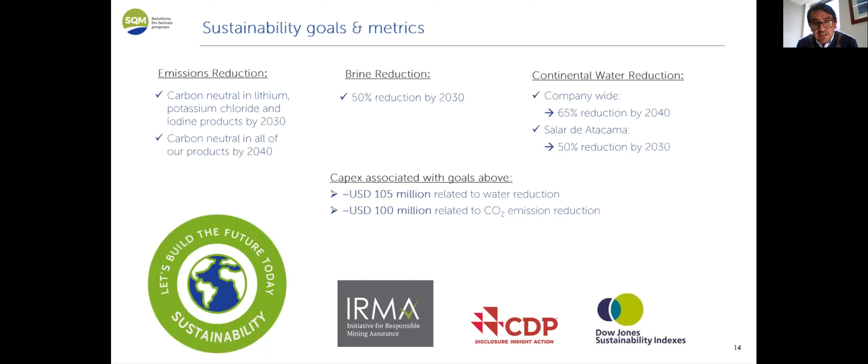In the next slide, it's important for us to be transparent about all our brine extraction. At the bottom of the right side you can see a link, sqmenlinea.com. If you go to that website, you can see in real time all the extraction from our production wells. It's a quite useful tool where you can see, every second, how much we are pumping out from the Salar de Atacama.

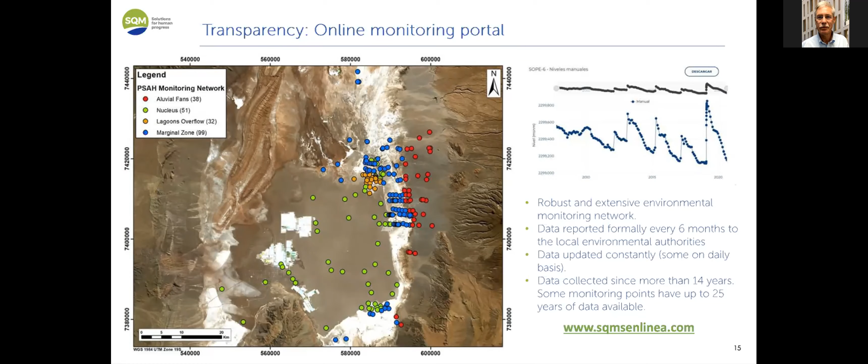I think it's the last slide—actually, no, it's not the last one. We have a big commitment to being sustainable in the Salar de Atacama, which is why we're working with different partners to understand very well all the impacts involved in lithium mining and potash mining. We are also preparing to apply for different standards like IRMA or ISO, because we are highly committed to doing the best job within the Salar de Atacama.

Let's move to the final topic of this presentation: our final remarks. In the next slide, we want to remark that, as you saw before, we have an extensive portfolio of products.

We participate in 5 different businesses. Today we have more than 50 years of experience producing nitrates and iodine, and also more than 20 years of experience making lithium and potash from the Salar de Atacama. Finally, we have to remark that we have strong goals for 2030: reducing our carbon emissions and also reducing our brine extraction and fresh water use.